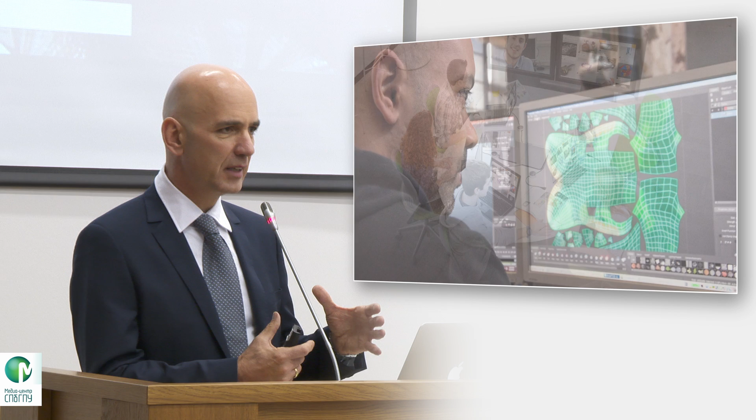This is also a portion of that—we have this digital prototype, and how do we get it efficiently out of the computer again and use this digital model to basically create things. If we start with capturing, it's really about new technologies that enable these days, easier and easier, to bring the real world into the computer.

These devices are getting cheaper and cheaper. That's a laser scanner. There are photographical methods to bring 3D into the computer. There are these drones. I also saw a drone in the Fab Lab that can capture data even of big surfaces and of construction sites.

But Autodesk—this is now an example of our software, Fusion 360—can take a point cloud and convert it into an analytical surface. And then suddenly you have that object and you can work with it. You can build new things added onto such an object, or even modify it in a certain way.

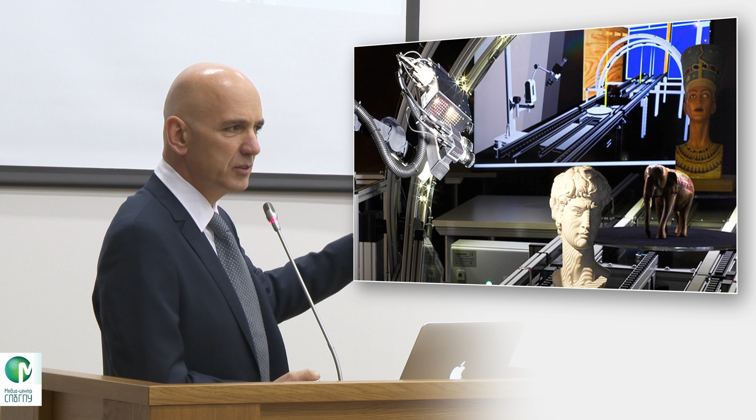And how do they plan the next step so they can see the progress every week? Maybe they do such scanning and have a much better overview of the entire construction site.

This is also used for factory design, and for knowing what's going on in a factory, and where they need to optimize and make changes and delete objects. So it's really a 3D object.

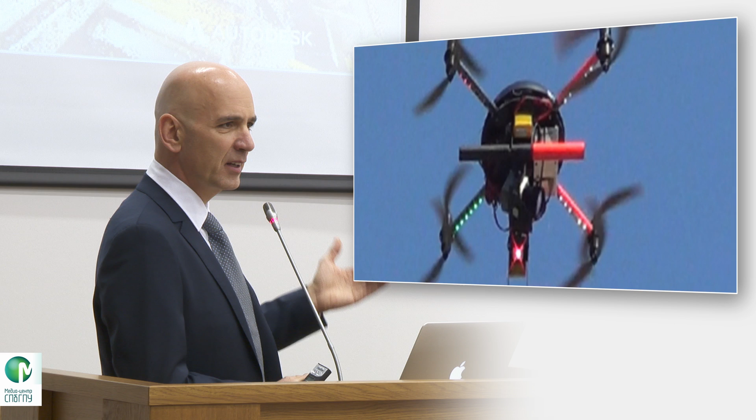It's generated—we have customers now, the most innovative ones, that do that every week. They have robots driving on autonomous little vehicles that are driving all around the factory, and they're actually capturing this every day, having every day a new representation of what's going on in the factory. So that is a very new field where the possibilities of computer power these days suddenly enable such possibilities.

Then the second one—the real point of capturing information—is then being able to compute on that basis, to create new things and understand the things, how we will build them.

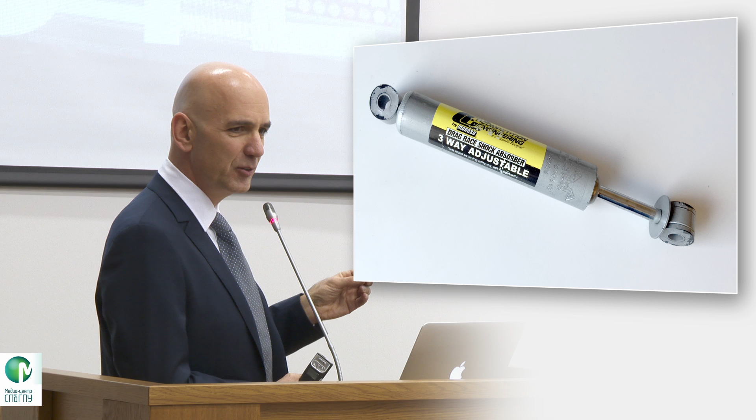You have all been involved in projects where you probably also had that feeling—I had that very often—that if you would have known in the beginning what you know at the end of the project, you would have done many things differently, because that's that learning process. That's the idea of having digital prototypes and computation, to create as much as possible a realistic model within the computer before it's built, with all its facets and all its attributes.

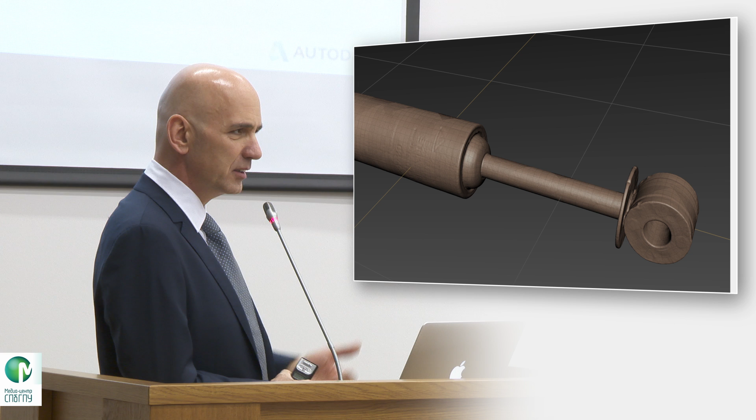This is something that is just on the tip of being available, starting today, to have infinite computing power to work and develop in a different way.

If you imagine, today you can rent a CPU for 4 cents an hour—that's about 2 ruble, about 2 ruble an hour. So if you think of that, and you have 4 CPUs working for you, optimizing something an entire day, that's about the cost of probably an espresso or a cappuccino.

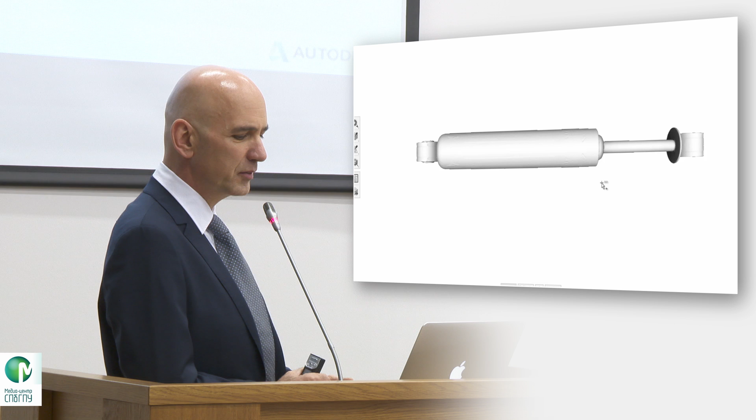The computing power today, as we look at it, is an asset—it's one of the only resources that gets cheaper every day. It's been the same with computers in general, machines getting cheaper and cheaper in relation to what they could do, and computing power is getting cheaper and cheaper. We can predict that in 2 years, computing power will be much cheaper than today, so you have more possibilities, while actually, most likely, a cappuccino will be more expensive in 2 years.

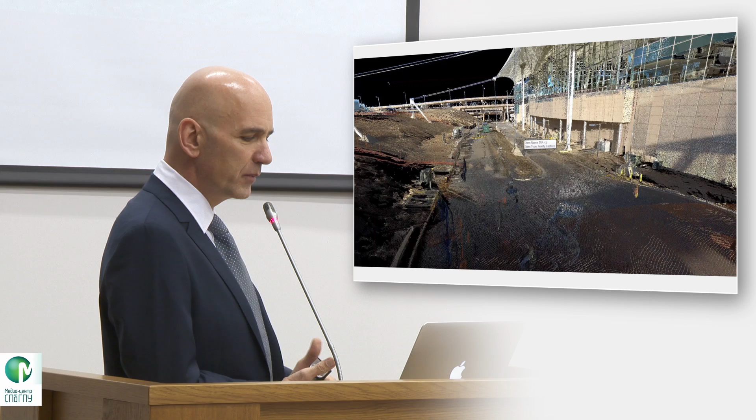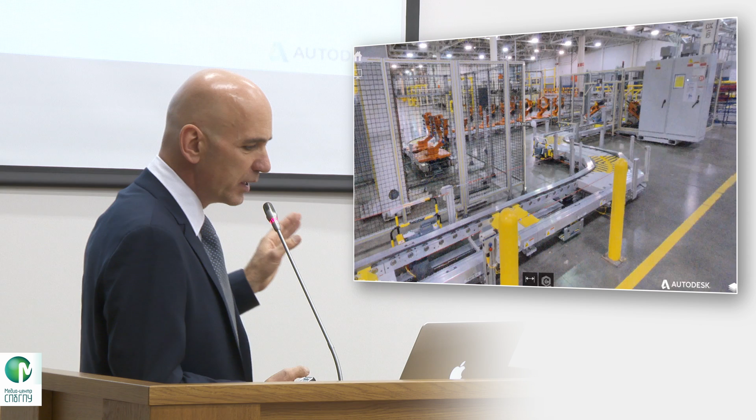Another example that's a bit more scientific is about simulation of mold flow. Moldflow is one of our products for plastic injection, simulating plastic mold injection. In the past, with the software you had maybe 3 components: the mold temperature, the actual melt temperature, and the flow rate. These 3 components define how your product will work. Ideally, you always want the lightest and strongest combination, and it always takes effort to find that. Then you have different variations.

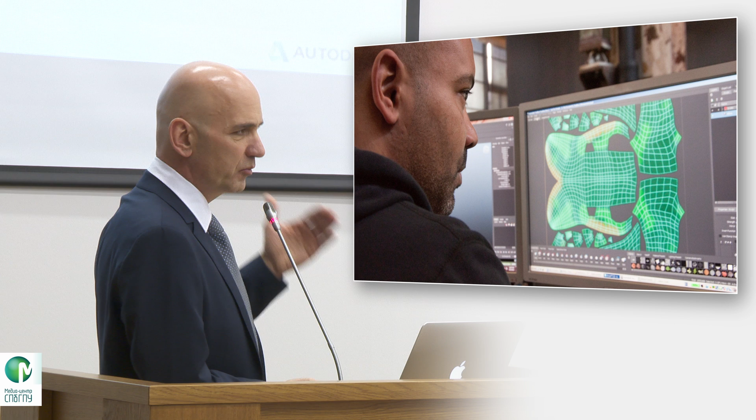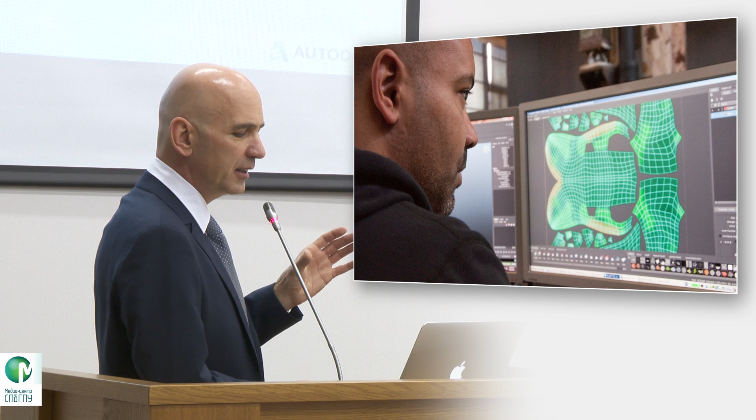Typically, you would have done them one by one, but with this infinite computing power and with tools that Autodesk is developing to optimize it, you can look at it from a different angle, and you define what you actually want to get out. You can have a multitude of variations calculated in the cloud that give you the most optimized result, and you don't need to wait days and days like on a regular computer until you get the result.

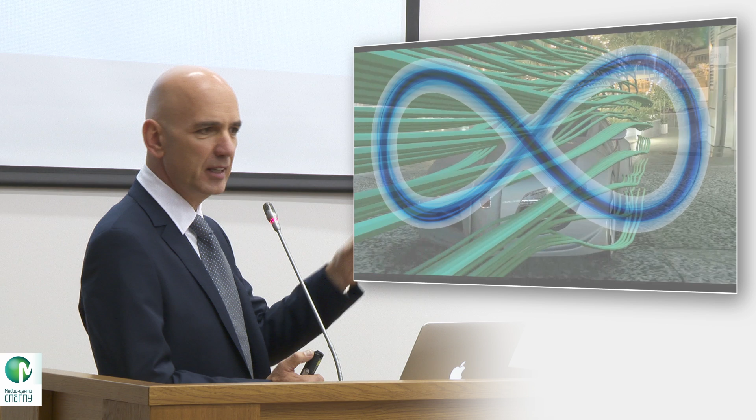This leads us to that term. Up to now we've defined ourselves in the industry as computer-aided design, CAD. So we're the CAD guys. But 'computer-aided' was always a bit of a deception - the computer or software was aiding a little, but actually it was just a tool where you were recording different steps as you build something. The new step is to really have the computer generate parts for you.

That's another interesting example, from a Formula One car - a bracket. The goal is always to make it as light as possible and as strong as possible. Sometimes in Formula One they design things just for the conditions of one specific day or one specific racetrack, changing the car just for the setup of that track. Our research and development team works a lot with this Formula One clientele, and here they took that part.

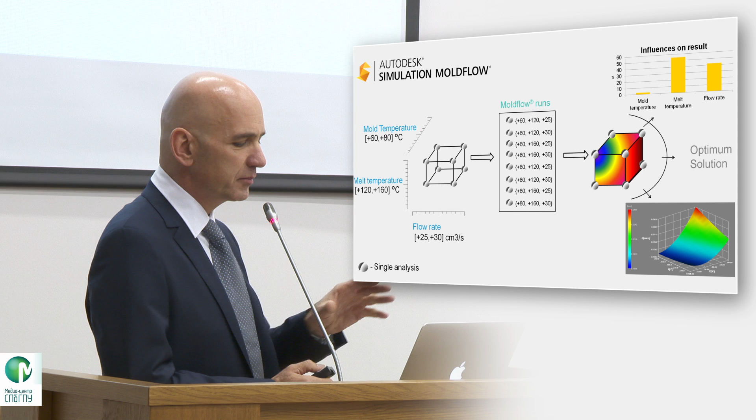We as a company, Autodesk, took that part and defined some fixed points - we have the hole in the middle and some mounting points - and then we want to generate the best solution in terms of strength and lightweight. What got optimized, the ability of the computer to fulfill those tasks, is that you have these struts that are not constructed anymore - they're only generated as an outcome of the computer. And that enables totally new possibilities in terms of manufacturing and creating things.

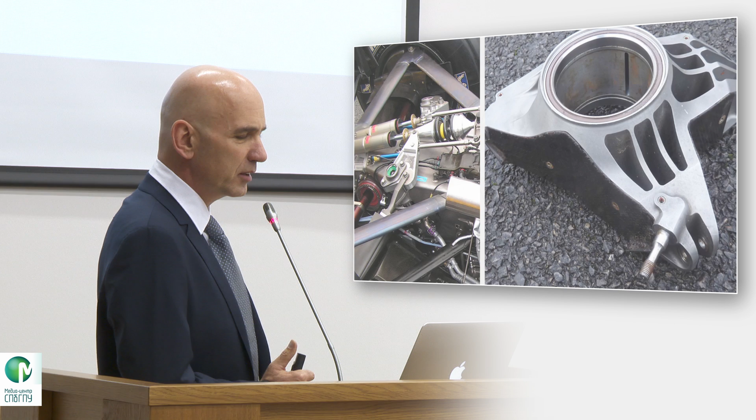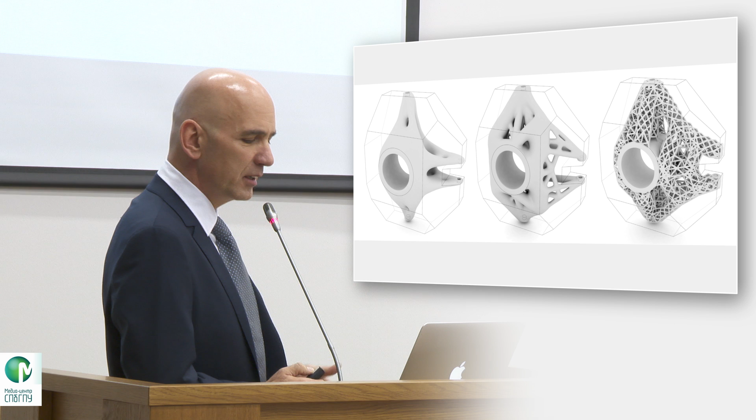Maybe 100,000 rubles or something, which is not much if you think of what in the classic way you would build prototypes, you would test physical prototypes, you would even test maybe in the computer with our CFD software, but you would decide at the beginning what is my first approach. Here you specify certain parameters, and the computer actually generates this whole device. What's interesting too, it's not only computer generated, it even looks very beautiful in my eyes, so it's got even some aspects of art in it. This is a very new way of looking at how things will be made in the future and how we use computer technology in a different way.

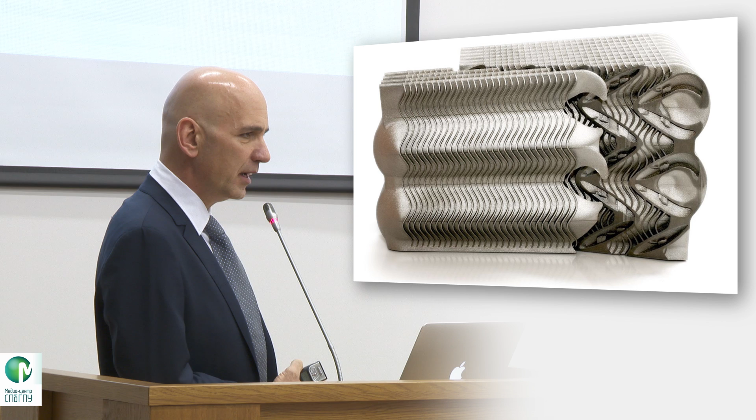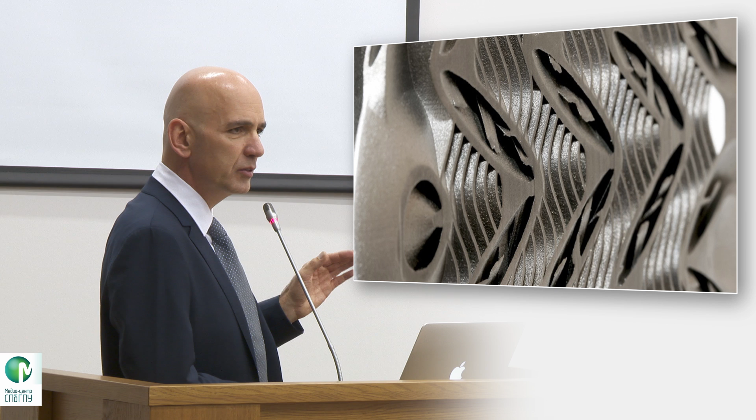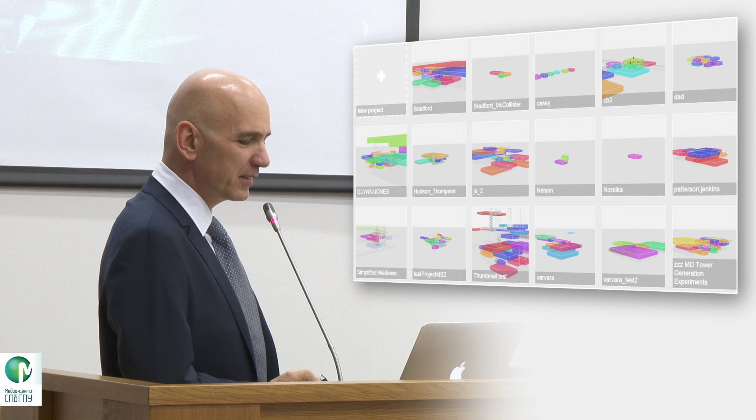So that was a bit of the section on computation. All of this is only possible if teams work together in general. None of us actually works alone, or as a student you may work on your thesis project on your own, but ideally you would also work together in a group, in a project-based learning group. That's the same in companies. Companies often work totally international, big corporations anyway, but also if you just take big building projects where many, many companies all work on one project and have to exchange data and collaborate. This is the same in mechanical engineering.

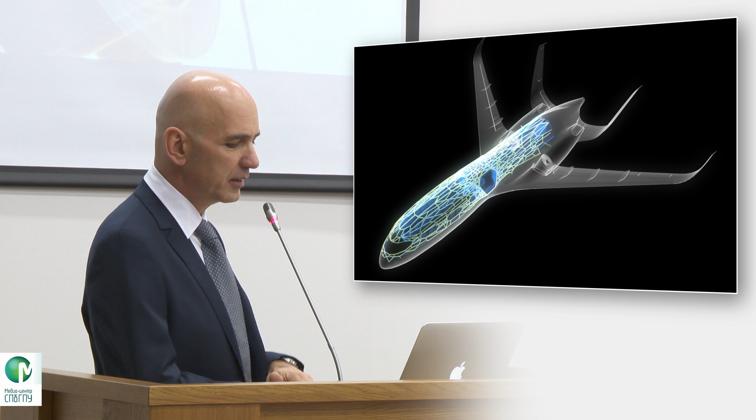I want to show a little bit of our idea of collaboration with a new software that is available for you, in the internet, free for students too. That's Fusion 360. Fusion 360 is a mechanical and industrial design software at the same time, so a combination of mechanics and industrial design.

What's interesting about it is that it's the first completely cloud-based computer-aided design product or development platform, and that basically enables two things. First, it taps into that possibility of infinite computing power, because it's based on the cloud, with direct access to the whole cloud computing power to scale operations and run things that are difficult on a single computer. Second, because it's a cloud-based environment, it's a natural hub for collaboration. Everything in the cloud is about collaboration, like Facebook is cloud, Dropbox is cloud, and there are many business services based in the cloud. So it's consequent that developing things will also move into the cloud and use a lot of these cloud options.

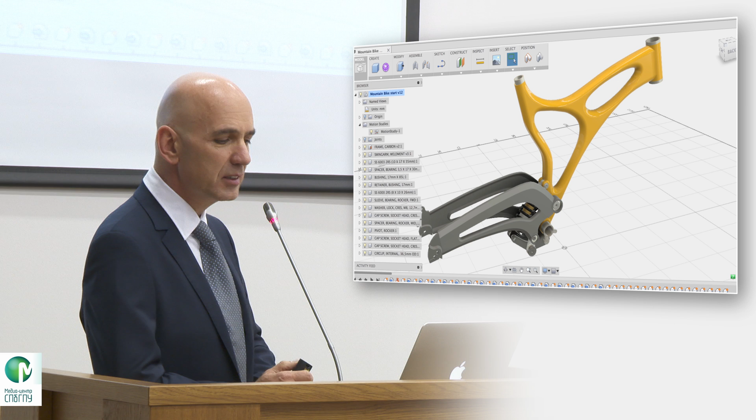And I hear very often that people then say, oh, that looks like Facebook. And indeed, I think not by intention, but the surface and these parts of how you work in groups and how you create groups has a lot to do with collaboration and how to exchange information. And this typically is then, because Facebook is done very well, it leads also always in this direction.

And it's more and more important that this component of collaboration and information exchange, faster information exchange in a product, in a development process, takes a more and more important role in this whole industry.

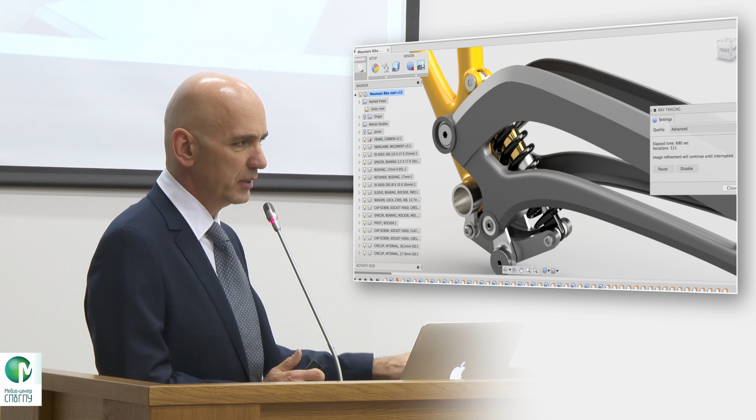And another aspect is it is accessible through this cloud on many devices. So you have your actual development that you work with on your PC, but it's accessible even on your iPhone. And if it goes about approval processes, about processes of showing it to somebody else, you have access to it on an iPad, on an iPhone, and you wouldn't typically construct on an iPhone, but you can do a lot of surrounding processes actually on other devices, on all the mobile devices, as especially your generation is used to do it basically every day.

So for an old construction engineer, he will say, oh, I don't need all that. But I mean, even for my generation, assuming I try to stay young and open to these technologies, that's very fascinating. And there's another aspect about fusion.

If you look at that picture, that is actually what also the cloud offers automatically. That's a very high level ray tracing, and this ray tracing is created in the background. So while you're working on objects, and we assume we have this endless computing power in the background that can fulfill tasks for us, fusion assumes while you're working what might be an interesting perspective for you, or you can also define some favorite angles and perspectives. And while you're just working on this, fusion generates high computing intensive ray tracing pictures in the cloud.

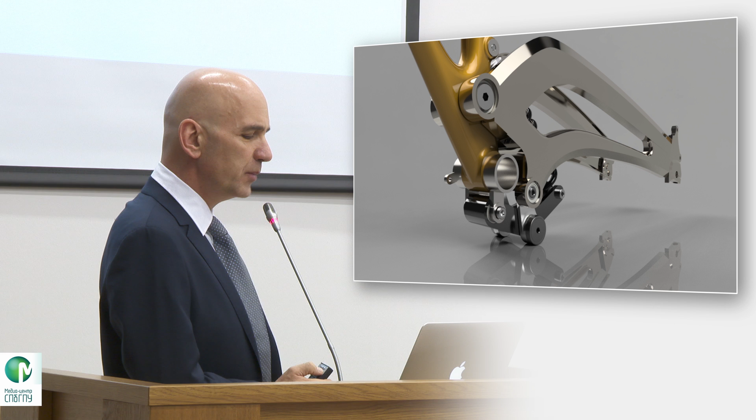This is more for when you work in the professional world, but it's the same idea of having, while there is a lot of PLM that has been around for many years as an idea and as a process. And there's many companies that invested millions of dollars in PLM systems, and kind of the feedback is always they don't work well. So they're too complicated, they're stuck, it's too difficult to administer them.

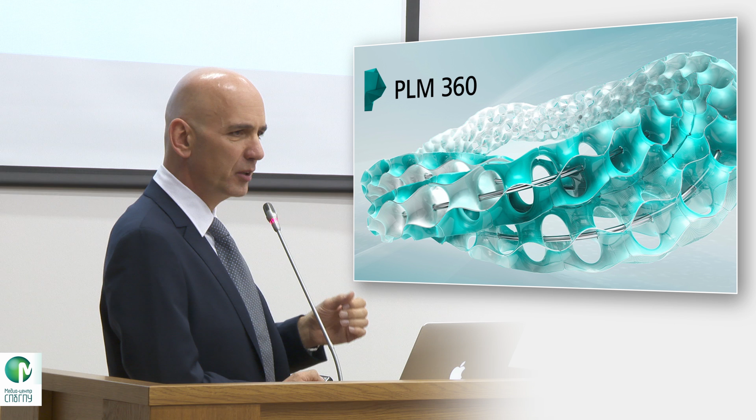And so Autodesk has created now a cloud-based PLM system, which is growing very quickly in the market, especially also with smaller companies, startup companies, that works in the cloud, where all these companies that work together among each other can use that cloud, like you use Dropbox to exchange things with your friends, and have a very clear and easy to use, and especially also affordable way to manage and store data.

And one of the interesting things there is also that this PLM system also runs on all the devices. So you have it on your iPhone, you can do approvals on your iPhone, you can do quality check approvals on different devices. And I don't know if it's good for work-life balance in the future, if everybody can approve everything, even on a Sunday. But that's the way where it's heading to.

And in conjunction with that, if you go to the education community, I know you probably all are part of the education community of Autodesk, where you get the software for free. I think Dimitri wanted to mention that still. I take it for granted that it's basically known here that Autodesk has that community where all the software is free for students and educators.

There is a new tool that we're just bringing out as a general platform. It's called Autodesk A360. And also as a student, you have several gigabytes of free storage. So every student that signs up has free storage there. Alexei, do you know how much storage every student has? Five gigabyte.

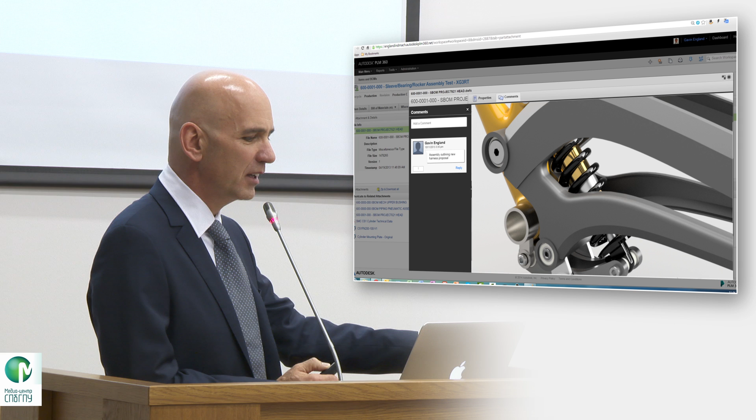25 gigabytes of storage, but especially you have also that communication platform tied to it.

So you're part of that, and you can create your own projects, create groups, and work in groups, basically similar to what you'd do in Facebook, but it's a more professional environment where student groups can use this platform to organize a project and organize their data.

This is something that the industry is also very interested in, and we have a lot of response to that, because from our knowledge of how things are constructed and how things will be going in the future, this is actually the way people today want to communicate.

So there's that very interesting aspect that looks like Fusion, and it's about project, it's about data, it's about people that work together. Let's come to the last part of the 4 topics we wanted to look at. That's a very interesting one - the create part. How do we get the stuff out of the computer in new ways?

We basically have 4 ways today of manufacturing, 4 ways of making things. One is additive manufacturing, which is typically 3D printing. Subtractive manufacturing is what is classic as CNC milling - you have one block and you subtract things to create something new. The third one we define as robotic assembly and also robotic handling and formation of things.

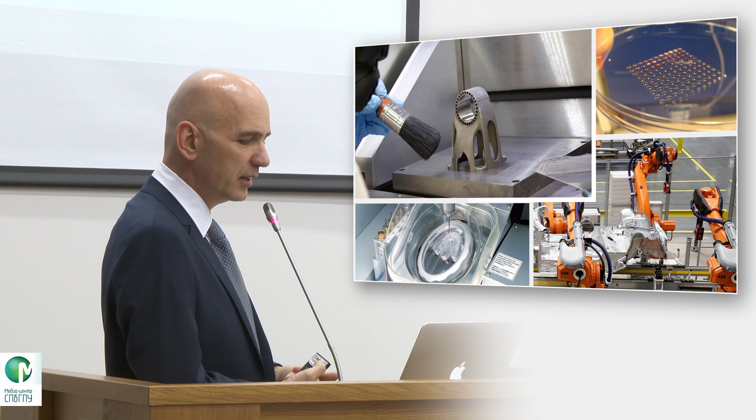This is a printer in the below $10,000 area that prints composites, plastic and carbon fiber, which makes a much more durable and lightweight, but also stronger material and objects. This is where things, together with metal printing, is heading.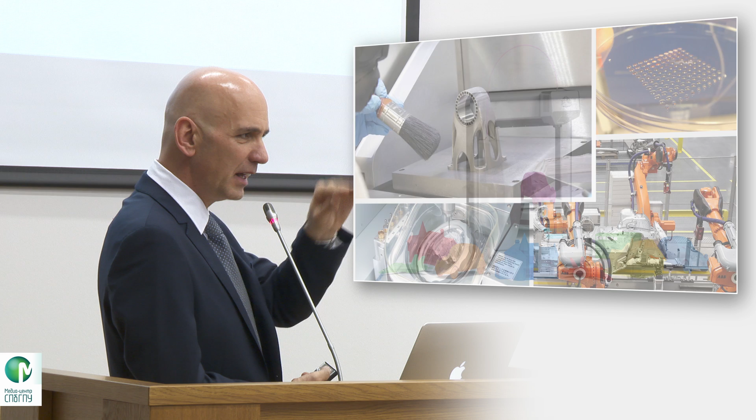That's actually an artist's work, very fascinating - it's also metal printing, done by some artists in Holland who work with this technology, with robots and with metal printing, which looks actually like welding. Well, metal printing is nothing else than another form of welding - if you weld, you actually also print metal, putting metal layers on each other.

This is very fascinating in the way that we at Autodesk also invite artists to come to our headquarters in San Francisco to work on projects, because they bring in a totally different perspective that often leads to new technologies that no scientist actually would find. This is also interesting in terms of what I see here at the university, that you have many different disciplines working together, and so you create new ideas.

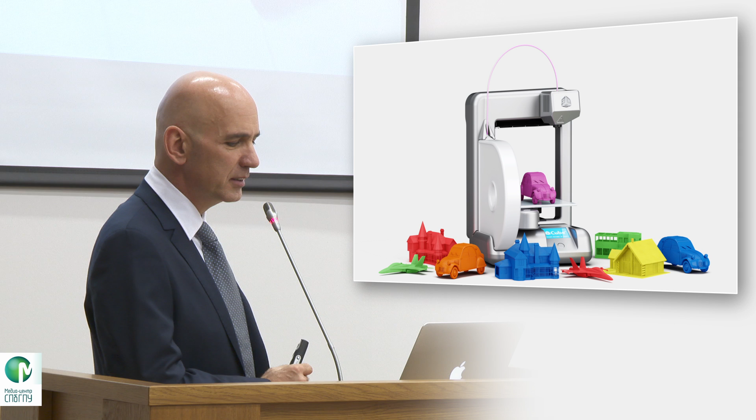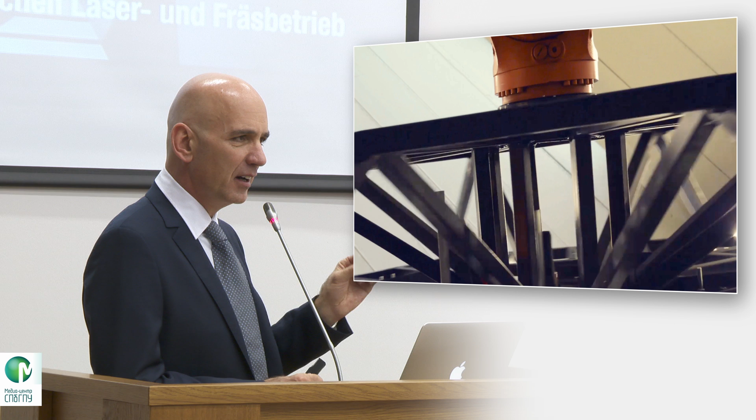Another example that our CEO loves, he has that machine actually at home. Carl Bass is a maker on its own. It's a combination of printing and CNC milling. You actually have metal printing, but because metal printing is never as precise as CNC milling metal, DMG Mori, a German producer, is basically doing this combination. They first print metal, and then refinish it with CNC technology in one machine. The arm is actually just changing between printing metal and then taking the milling tool to refine it. Very interesting stuff that opens totally new production ideas, because you can print things that you cannot CNC, but you can possibly refine it with the CNC just on the surface.

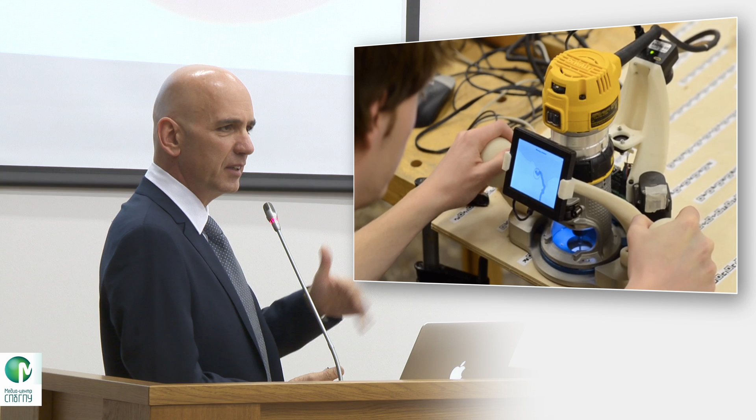It's not always predictable. You have a 3D object, and it doesn't always come out on the 3D printer the first time exactly as you wanted it. This is because there are still some limitations. Autodesk has now started to contribute a platform with a freely distributable software technology that can be adopted by anybody, students, scientists, companies, also 3D printing companies, to be used as their middleware, as their basis. It's a bit like, if you know Adobe, like EPS of Adobe, which is the standard PostScript for printing. So most prints are generated in EPS. Autodesk now wants to establish that new format for 3D printing.

It's probably not the only one trying that, but I think we have a lot of knowledge around it. Together with that, Autodesk has also developed, coming out I think still this year, its own 3D printer. It's a photoresin printer that Autodesk has developed, but the idea is not to jump into becoming the biggest printer producer. We're staying mainly on the software side, but it's about having that reference combination of our software Spark and a 3D printer that shows how things can develop smoothly and how they work together. The demand for the printer is amazingly high, I think those already produced are all sold out. And the interesting thing is Autodesk does not make any secret about the printer.

So the whole construction plans of the printer, and even the sourcing - where did we buy the parts, how do the parts look like, what technology is this - is all freely available. So everybody can take this and build his own printer, or use that as a basis for building new material and new technologies. The idea behind that is really to accelerate the professional use of the printer.

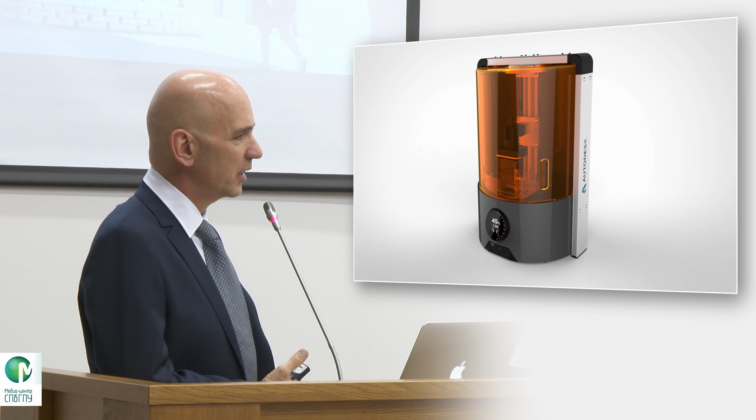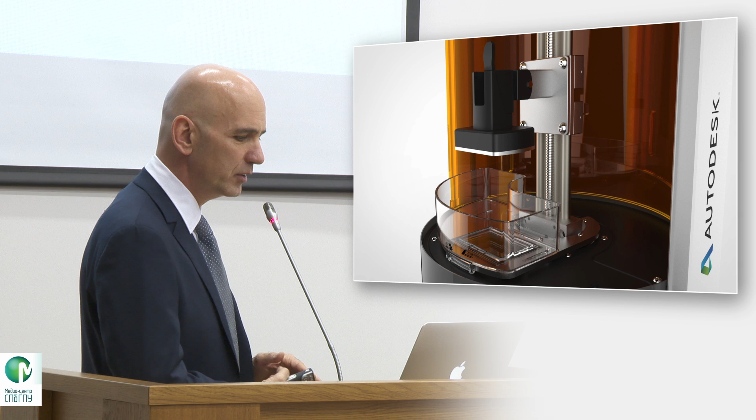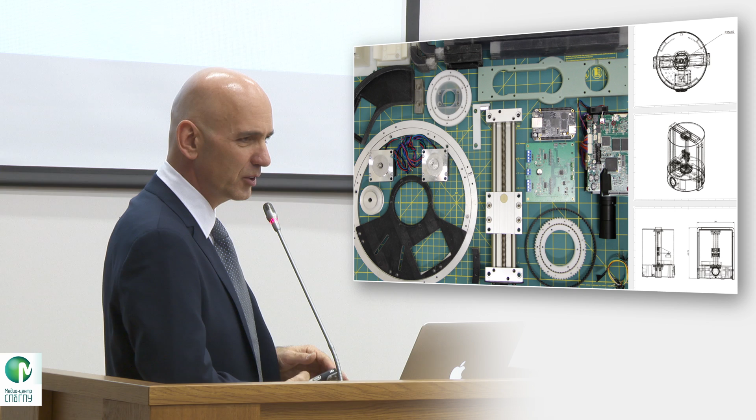Probably in 30 years, if kids ask how did you treat people back then, it will be like how we think about treatments 100 years ago. We would say, yeah, we gave them some drugs that poisoned the whole body, and we were just hoping that some of the drugs reached the right point to have a treatment - especially with chemotherapy.

And this DNA does not actually carry information, it's just a structural element. Somebody explained it to me - it's not easy, but it is doable: if you bring the right components together, they self-assemble automatically, naturally, into what you want to have. It's definitely still a long way to go there, but it's a very fascinating field where we hear more and more advances in technology.

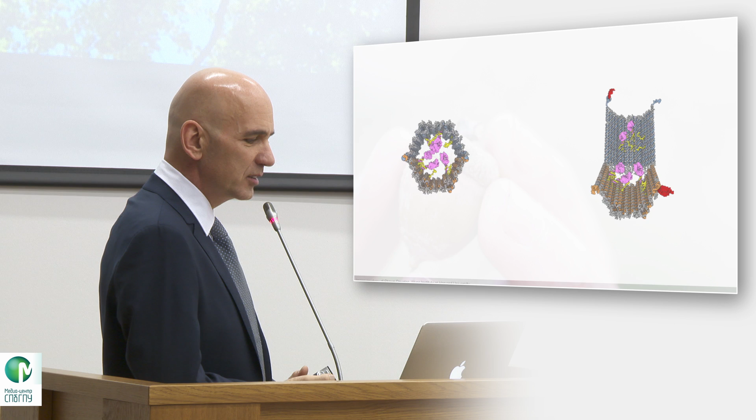This is very, very far into the future, but I think a lot of people are working on that all over the world - in Russia, in the US, in Germany I think. It will open a way to have materials that, like this acorn, actually create out of this a huge tree - to have totally new things created in the future out of biological material. So that was a little fly-through of some of the thoughts that Autodesk is working on.